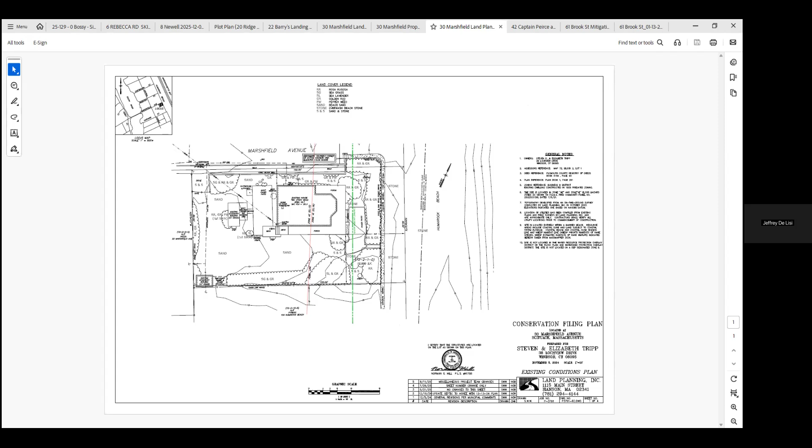The property presently is non-compliant with Title V standards. The goal of this was - this is entirely a previously disturbed site. It was once the site of a hotel. There is, as so many of the properties along the ocean, which is directly to the east of this, on the right of your screen.

As is the case, there's a concrete retaining wall which you can see that kind of goes the entire rear of the property and wraps around into Marshfield Avenue, which is not actually a street that is utilized for passage of vehicles anymore. It's kind of stopped off by the town because it's kind of the entrance to the public beach. So essentially, over time, my client has planted some Rosa rugosa.

They've owned the property for over 20, maybe 30 years. Sand has migrated and so forth into the property in the approximate area, especially along Marshfield Ave, and then you can see on the plan there's some vegetation that's in the area of that building, the detached building to the left of the dwelling.

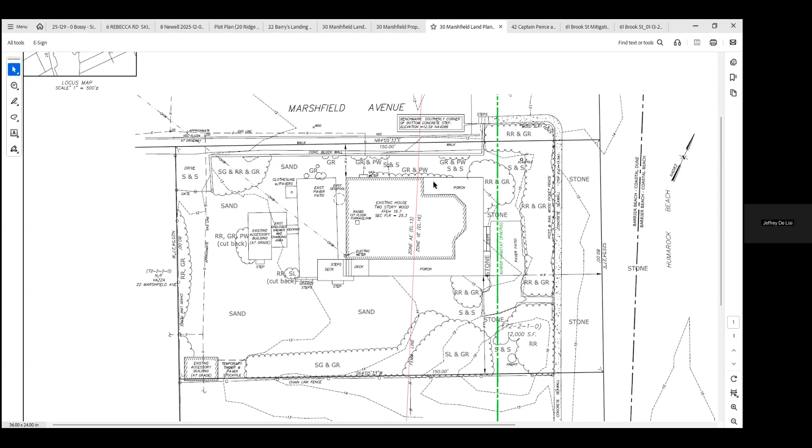What the plan and the goal is here is to create an ADU by removing that building in the detached building to the left of the dwelling, and by removing the accessory structure off the bottom, on the corner of the property, bottom left, and by removing the patio, and thereby putting an accessory dwelling unit in.

The planning board has approved the ADU to be a 742 square foot gross living space ADU, and you can see it there, but it looks bigger than that because the dash lines on the top and bottom of the box indicate decking. So it's really 742 square feet, and then there are two decks totaling about 336 square feet off of the north and south of the actual dwelling unit itself, attached to it.

And the concept here is to raise the structure onto piles and take what is existing, two buildings, completely outside and above the FEMA flood zone.

When we were here, we've addressed that Stan Humphreys, our coastal geologist, had submitted two letters to the commission going through the standards of coastal dune. There was some question early on in this application as to whether there would even be a pathway for approval of this. I think I explained to the commission that I had spoken with Greg DeCisa. He confirmed and told me that I can tell the board that the standard for new structure in this area would be no adverse impact on the resource area.

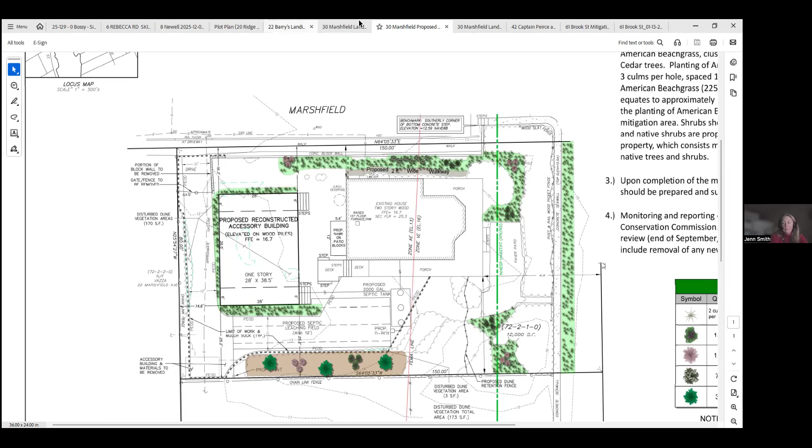Okay. And then we have to move out to March 2nd. I would do March 16th or the 30th. Okay, I'm just saying I wouldn't do March 2nd. Okay, all right, so if somebody wants to try to make a motion...

I'm not trying to make a motion. I'll make a motion to continue 30 Marshfield Avenue until the March 16th meeting. That's Robbie. Do I have a second on that? I'll second that, it's Roger. Penny? No. Okay, Eric? Yeah. Okay, and Frank, yes.

So we'll continue to then get that information to us and anything else as soon as possible, if you could. Yeah, I appreciate it, thank you very much. And I think you get the gravity of where we're going with this, Jeff, and I hope we can get some real good information. What's the date again that you landed on? March 16th. Okay, thank you very much, everybody.

You don't have any deposits down for a vacation then, do you? If I do, I'll cancel them for you. Oh my God, I wouldn't do that. All right, thank you very much. Have a good evening. Yep.

Let's see. What's here? 61 Brook Street, I got to open that one.

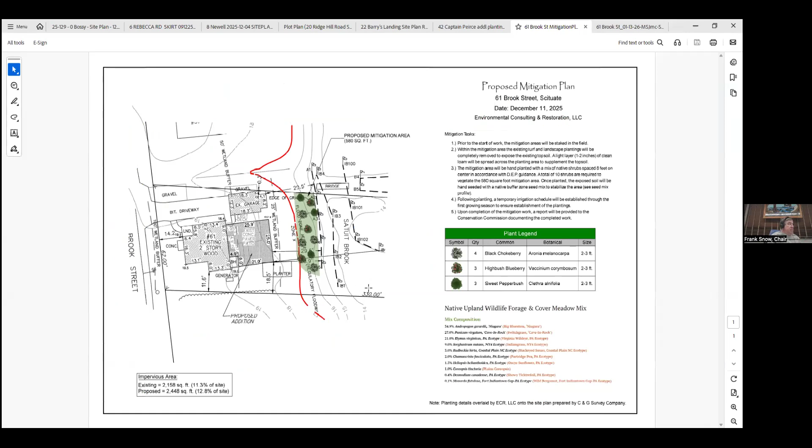On January 21st, 6 p.m., the Scituate Conservation Commission will hold a wetland hearing under Chapter 131, Section 40, the Massachusetts General Laws, and Section 30700, Town of Scituate Code of Bylaws, for a notice of intent filed by Dana and Denise Baki, for the construction of an addition of a single-family dwelling within riverfront and vegetated wetland resource areas located at 61 Brook Street, Scituate. Abutters and other interested parties are invited to attend. Information to access the meeting will be available on the agenda posted on the website.

Good evening, members of the commission. Brad Holmes from ECR on behalf of Dana and Dennis Box for their property located at 61 Brook Street. We filed a notice of intent for a single-family home improvement project. A DEP has reviewed the application and issued a file number.

Thanks, Jen, for pulling up the plan. What you have in front of you is the existing and proposed conditions plan to include the mitigation proposal. So let me go over what the site contains, and then we'll get into the home improvement project. So 61 Brook Street contains an existing single-family home with a paved driveway, a detached garage, patio, well-maintained lawn and landscape. And as you move to the right of your screen, or easterly, there's the Satuit Brook with its wetland resource areas that flows through the property.

So we have the Satuit Brook with a 200-foot riverfront area. We have land subject to coastal storm flowage, which you can see there in the red line is the FEMA flood zone associated with the brook. And we also have a little bit of a bordering vegetated wetland fringe to the Satuit Brook.

The property actually extends quite a bit to the right of your screen. It heads over to almost towards First Parish Road. The property was built according to the Scituate Assessors records in 1895, so it's a property that predates the wetlands regulations. Thanks, Jen. You can see that it is a fairly larger parcel, but unfortunately that land to the right is a wetland resource area.

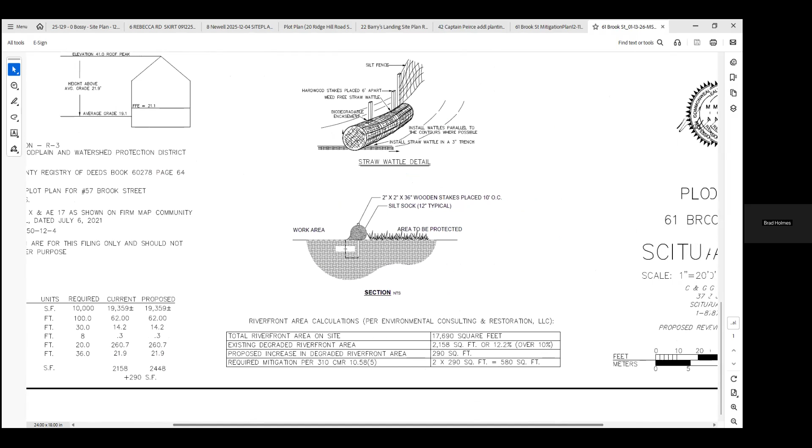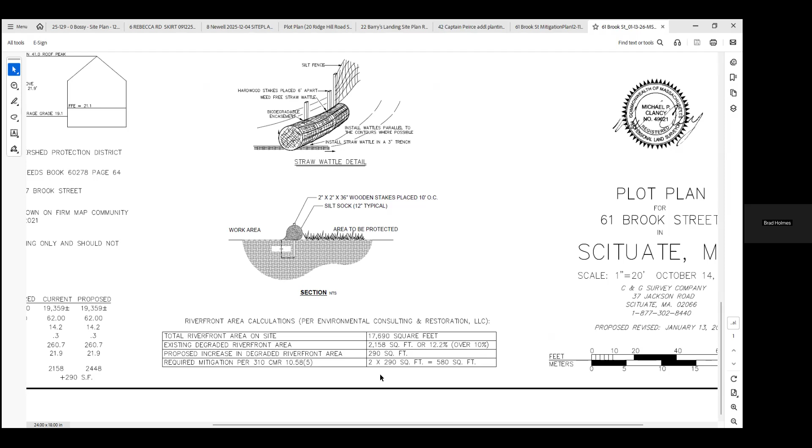So for this project to comply with the riverfront standards, because it's a previously developed riverfront, we're held to the standard of any new increase of degraded area, which would be the area of the proposed addition outside of the patio. We have to mitigate that. So we have approximately 290 square feet of new degraded area associated with the addition, that's the portion of the addition that would sit over the lawn area. So to comply with the riverfront regulations, we need to mitigate that at a 2-to-1 ratio. So we're proposing 580 square feet of mitigation, which would consist of native plantings to remove a lawn and landscape area and revegetate that with native vegetation, native shrubs, and a seed mix. And that would also increase the vegetated buffer strip, which the Conservation Commission regulates under the wetlands bylaw, so we're able to stay outside of the FEMA flood zone.

We're able to develop over the existing developed lawn area. It's a fairly smaller improvement project to bring this home up to a better livable standard. With that, I think I'll bring it back to the commission. We've been able to meet compliance with the riverfront regulations and other regulations, and I think we've been able to come up with a good mitigation proposal to increase the vegetative buffer strip to the stream. So with that, I'll bring it back to the commission.

Thank you, Brad. Jen, do you want to comment first? Yes. Can we zoom in a bit more so we can see where the proposed work is?

I do want to say no comments from DEP. We do have proof of abutter notification, and the plan we're looking at is from 1/13/2026. It might be a little hard to see, but in the back of the house there is a concrete patio that almost goes to the back of where the garage is. So that's some of that disturbed space that's already there that I think they are trying to work with. Otherwise, there is some of this addition adding to the 50-foot buffer. And the work is outside of the flood zone, as was mentioned. And as you saw on the other plan, we do have a mitigation plan with some details to it.

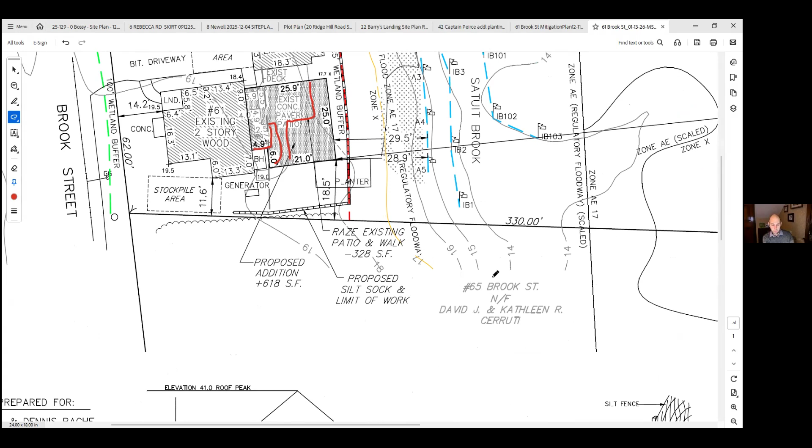I'm looking at the narrative that I have in the notice of intent. There's a riverfront area calculations. Are you referring to the numbers on the plan in the table, or the narrative? The one that's on the plan, just because, and maybe I'm misunderstanding this, but for riverfront, the percentage degraded is in totality of what's on site currently within that riverfront area. So I just was looking for clarity. It's just if you could walk us through what those numbers are in reference to what's on the plan in front of us today. Sure.

So the total riverfront area on the site is as stated, 17,690 square feet. The existing degraded riverfront, which consists of areas that have a loss of topsoil, so it would be the driveway, the walkways, the patio, the garage, that's 2158 square feet or 12.2%. So we're already over the 10% of riverfront that you'd be allowed to add up to. What we're proposing of new increase of degraded riverfront is 290 square feet. That's the area of the proposed addition that's outside of degraded area and sits within an area of lawn. Even though the lawn is developed, it's not degraded per the riverfront standards. Right, so any increase that we do on the property, because we're already over 10%, the only way that we can accomplish adding new degraded riverfront is if we mitigate that at least a 2-to-1 ratio. So we're proposing the planting area at 580 square feet to comply with the increase of that 290 square feet.

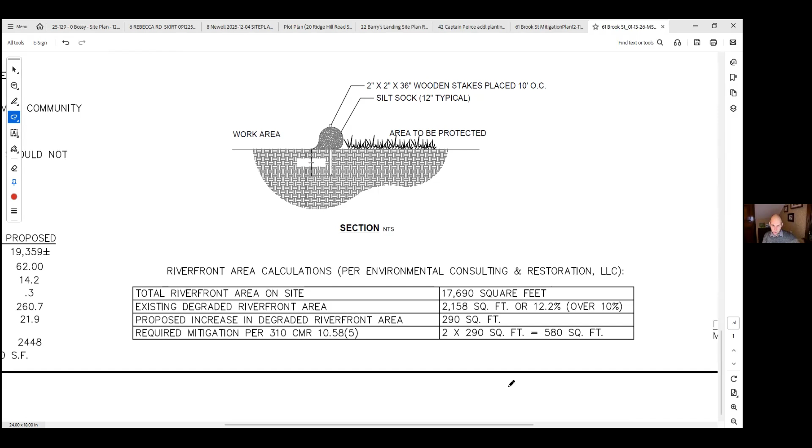Excellent, thank you, I appreciate that. Just walk through on that, so we could all have an understanding of where that number comes from and what that number at 10% means. So thank you for that. Sure.

My other sort of thought on this is just work within the 50 that is new, in terms of impervious area outside of the existing concrete paver patio and existing garage. I don't know if there's a way there could be a reduction of work within the 50 that does not already have impervious on it, whether that's the existing deck still visible here on the plan, or incorporating the garage into the project, working within areas that have already been disturbed within the 50 rather than introducing new encroachment onto the 50, because that's certainly something that, as you know, this board tends to push back strongly on.

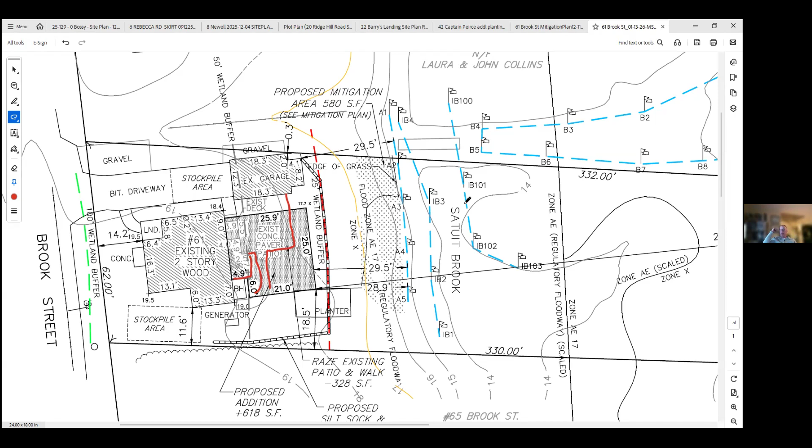Dina, want to I'm here. Yeah, I am. We're eliminating that back entrance, so we have an entrance in the front door and the current one on the side. There won't be an entrance between those two, where the 25.9 is, not on that side. I'm not sure - north is to the left? To the top. Yeah.

I mean, would grass grow between those two structures? I'm not sure, maybe, I guess. I don't know, if we take out the patio - I'm not sure enough sunlight would reach it, but I guess I don't know. That's my only thought on changing that area to grass.

And then where the proposed mitigation is, that's currently lawn, the 580 square feet of mitigation area - yes, it's lawn and there's a landscape planting bed in that area. So we take out the landscape planting bed and lawn and then replant it with natives. Okay, well I think that if the elimination of the patio between the two structures causes a reduction in that mitigation area, I'd rather have the mitigation area than the grass between the two buildings, personally.

So then the 25 by 25 foot is like a 625 square foot addition? Actually, it's listed on the plan as 618. 618, okay, thank you. No other questions.

Okay, Roger? Yeah, if you said this I missed it, Brad - what's the distance between the proposed structure and the garage? Going back to Robbie's question about grass growing there, how big of a space is that? It's not marked on the plan, but I'd say probably 5 or 6 feet. Okay, okay. All right, I don't have any other questions.

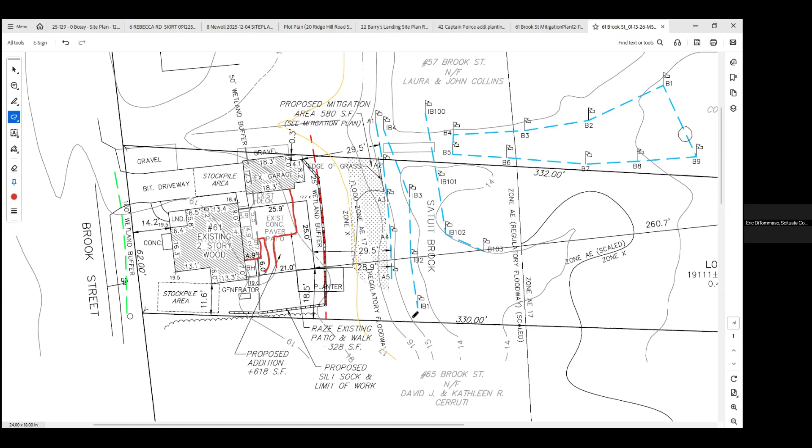Did I cover everybody, right? So I get it, it's a tight area. Houses are already established. The brook already has a garage that encroaches. So it looks like the applicant's sort of holding this similar encroachment towards the brook.

And this is on a full foundation. I think you said that. So there's obviously going to be a little bit more disturbance towards that buffer until it's backfilled and graded. Sorry, I think he said it was a crawl space. So either way, they're still got to dig down 4 feet or so.

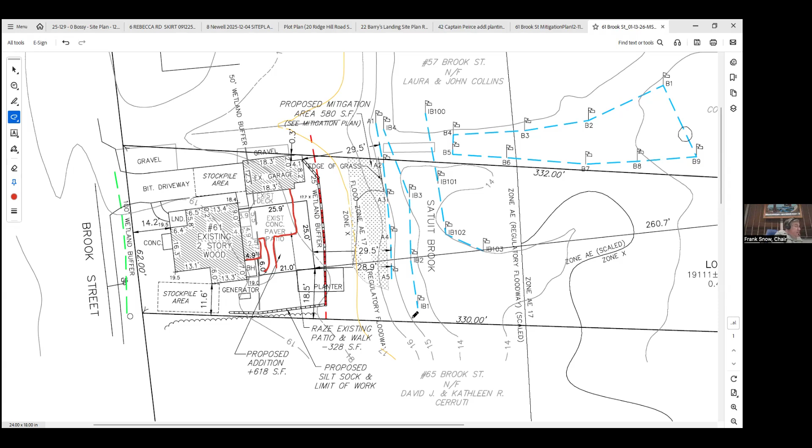So, the trenching and the fill material and whatnot, you're going to disturb probably another 5 or 6 feet beyond, and then it'll get replanted.

I also know that all along that stretch, there's a number of houses that are pretty close. The old fire station sits on top of it, or the parking lot. There's just a lot of encroachment along there. I think in terms of environmental benefit, certainly we don't like to see things encroach more, but if we were to get a substantial buffer, to me that would sort of balance out

the additional encroachment. But I'm wondering if that mitigation area could extend from property line to property line. I'm not quite sure why it has that little curving piece, Brad.

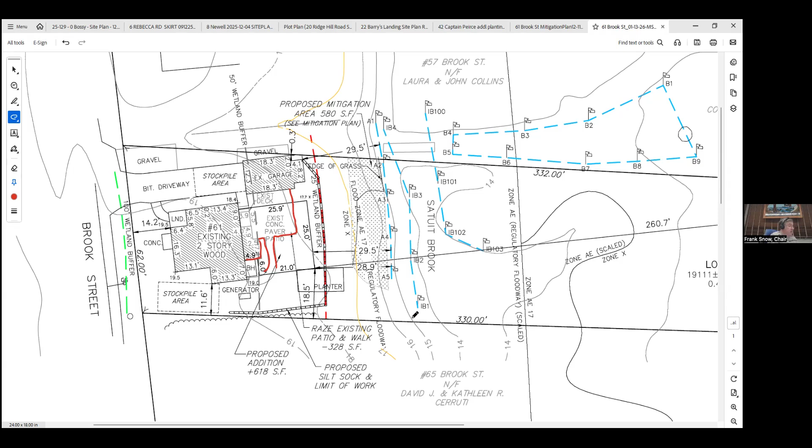Yeah, we could look at that. Is there a reason that... That was kind of, yeah, it was taking into account there's a landscape bed there and there was lawn. When you look at the property in the field, the bridge that's actually on the other side of the property line kind of feels like this property. So in the field, the property lines feel a little different than what the surveyor was actually able to correct. But we can look at bringing that mitigation area further, I guess, west, and also address Eric's comments.

I guess that's what I'd like to see, is just some more mitigation. We're willing to work with a 25-foot buffer, or 30, whatever it looks like. Maybe it might be close to 30 feet as opposed to 50. But I also get there's already a concrete patio and some other changes, so it'd be good to see some of that

corrected. How do you want to move forward? Anybody? Jen? Well, Robbie does have his hand up, and I'm sorry. Robbie?

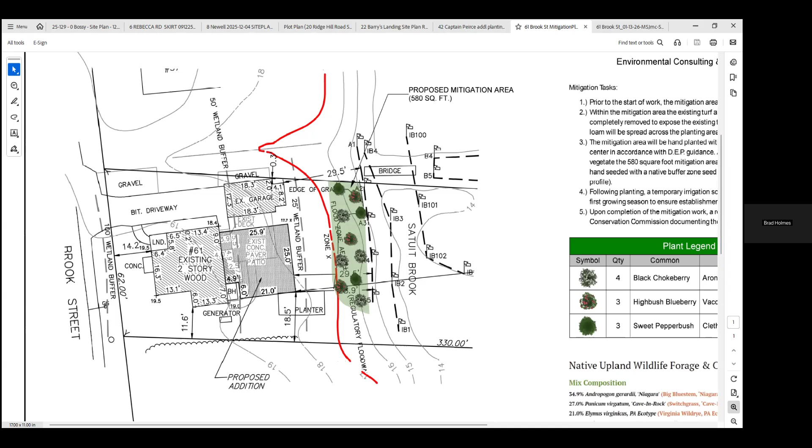Yes, we're in the 50-foot, but as I said, this property was built in 1895, so we're stuck with what we have - but how can we make that better? How can we make a better vegetated buffer strip than what exists now? This site doesn't have a vegetated buffer strip, but if we can come back to the commission and show you we're creating a new buffer strip that significantly mitigates the proposed addition, then I think that's what we're going to look at doing and coming back to you.

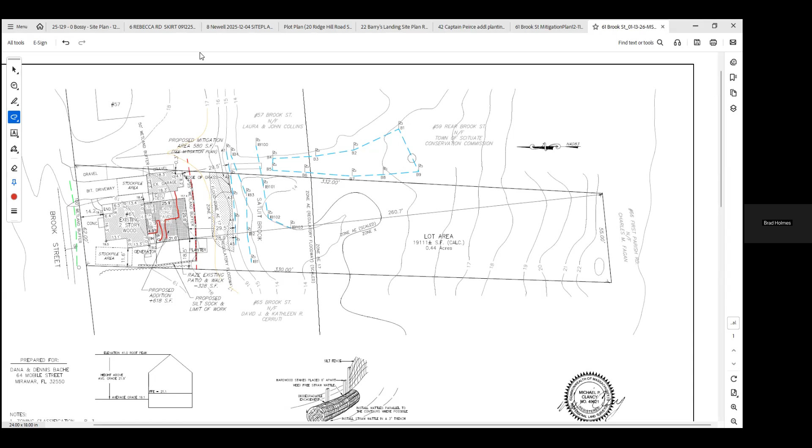Just moving it away from the brook a little bit would be helpful. Maybe architecturally it's the way that it works, but I think the setbacks in that zone are only 8 feet, if I remember correctly. So something to consider - they might be able to get close to the same square footage but with a different configuration. I'd take a look at those things in the buffer, let's continue it and come back to the commission members and see.

The other thing that might be helpful - I know you can't go into other people's property, but maybe next time give us an image of what it looks like to the left and right of this property so we can see how that disturbance impacts the area around it. I think it would be helpful to know what's happening on either side, even if it's just some aerial information.

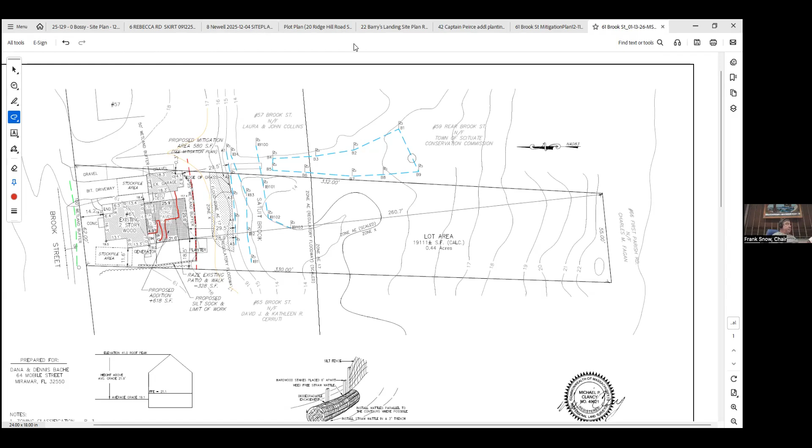20 Ridge Hill, this is a continuation. I think we opened it, but I don't remember if we've discussed it - I think we just continued it, and this is Brad Holmes as well.

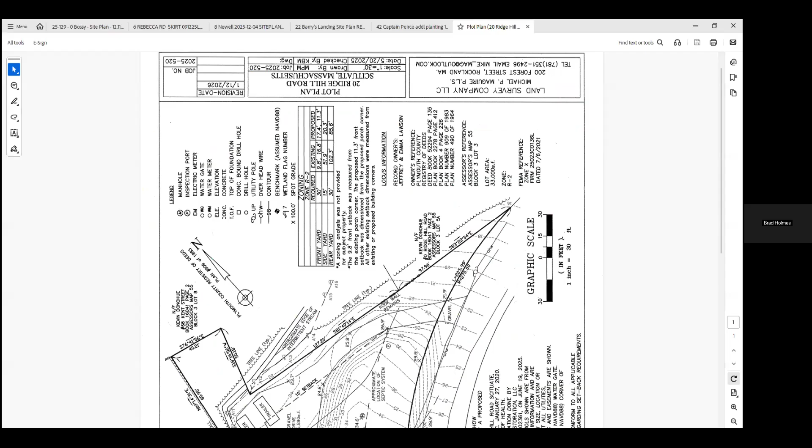We've submitted a notice of intent for 20 Ridge Hill. The applicant and owner, Jeff Lamson, is on the line. The application is for a single-family home reconstruction project. DEP has reviewed the application and submitted a file number. The site contains a single-family home, an outbuilding or accessory dwelling unit, driveway, lawn, and landscaping. This is a pre-existing building built around 1900, according to the assessor's department.

Thank you, Jen. You can see the property here off Ridge Hill Road. The existing house is situated towards the front, near Ridge Hill Road. There's a driveway extending around the property, coming into that existing building and deck area of about 900 square feet, then continuing around the rest of the property and exiting back onto Ridge Hill Road.

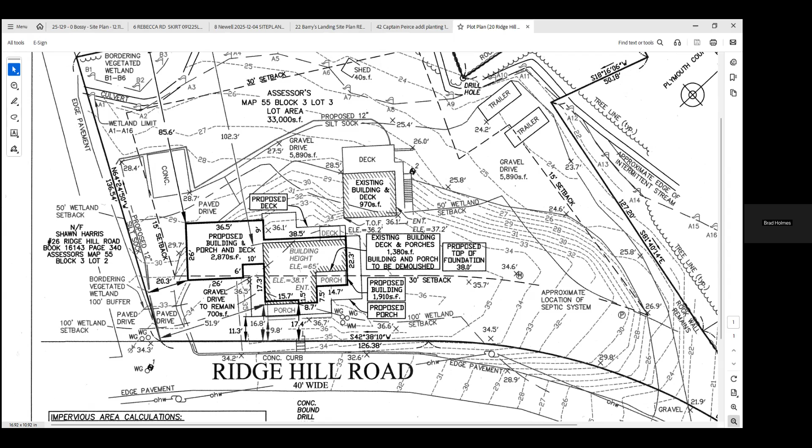We're here with the commission because there's a bordering vegetated wetland with an intermittent stream located on the site, toward the western portion, heading north. The wetland has been delineated - you can see the wetland flags. The 50 and 100-foot buffer zones extend from there. The 100-foot buffer zone almost hits the street, so we're fully within the jurisdiction of the commission. We don't have flood zone or other resource areas like riverfront on this property, unlike the last project.

What we're proposing is to remove the existing home and reconstruct a new home, basically within the general footprint of what's existing now, adding an addition off the south side. The addition would contain a porch and deck, totaling 2,870 square feet. The area of work occurs outside the 50-foot buffer zone.

The change in impervious surface is approximately 5%. The project doesn't require a stormwater permit per the Scituate stormwater regulations. The project doesn't necessarily trigger mitigation since we're not working within the 0 to 50-foot buffer zone.

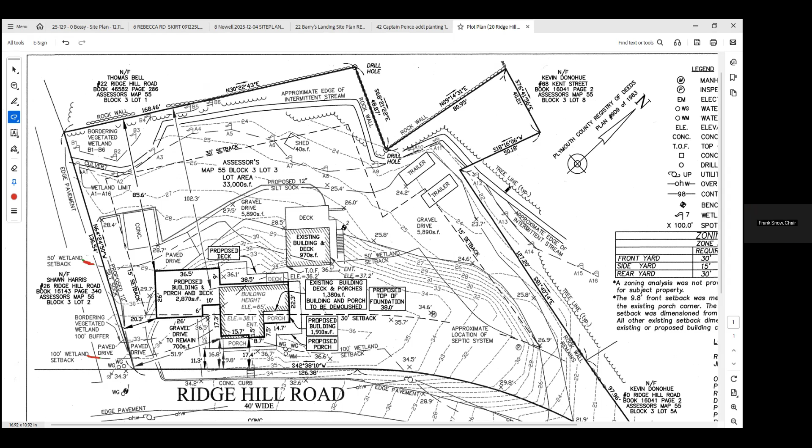So this is 8 Newell Street on January 21st at 6 p.m. Scituate Conservation Commission will hold a wetlands hearing under Chapter 131, Section 40 of the Massachusetts General Laws and Section 30700 of the Town of Scituate Code of Bylaws for notice of intent filed by Christopher Wynn for the demolition and reconstruction of a single-family dwelling within coastal wetlands resources located at 8 Newell Street, Scituate. Abutters and interested parties are invited to attend. Information to access the meeting is available on the agenda posted on the website.

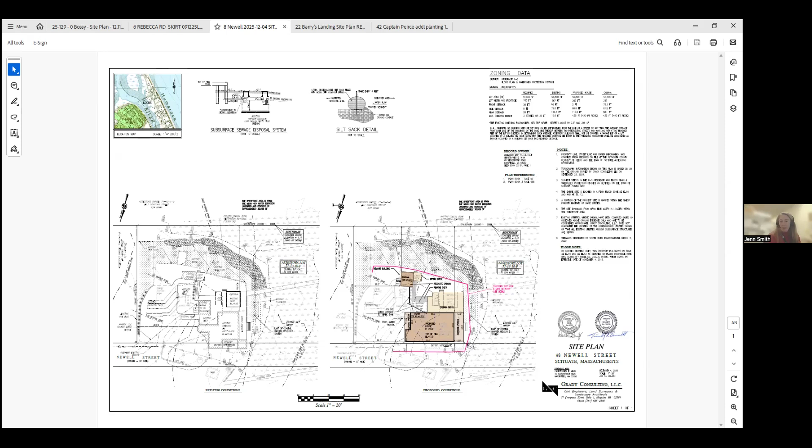And we have somebody from Grady, maybe? Okay, Jeff DeLisi, I'm unmuting him. Sorry, and then is somebody from Grady here? Yeah, Darren Grady, you can look for Darren. Darren, all right, I unmuted Darren. And you might want to promote Chris Wynn in, to the extent that you ask some questions he could be responsive to—that way he might be unmuted.

Jeff DeLisi, Ohrenberger, DeLisi and Harris. I can't remember the composition of the board when the prior projects that involved this property were before it. Those projects were after COVID.

Chris and Beth Wynn own the property. The two prior projects that occurred were a dock project and a project to remove a pool, which I don't really need to get into too much, but both of those projects were issued—one was issued an order of conditions, the other, the removal of the pool, was issued a superseding order of conditions in 2022. Both, to my knowledge, have received certificates of compliance. The superseding order of conditions actually verified the wetland flagging that had previously been done by South River Environmental, which is depicted on your plans before you tonight.

The Newell Street, it comes in off of Central Avenue, and actually runs in both directions, east and west of Central, out in Humarock.

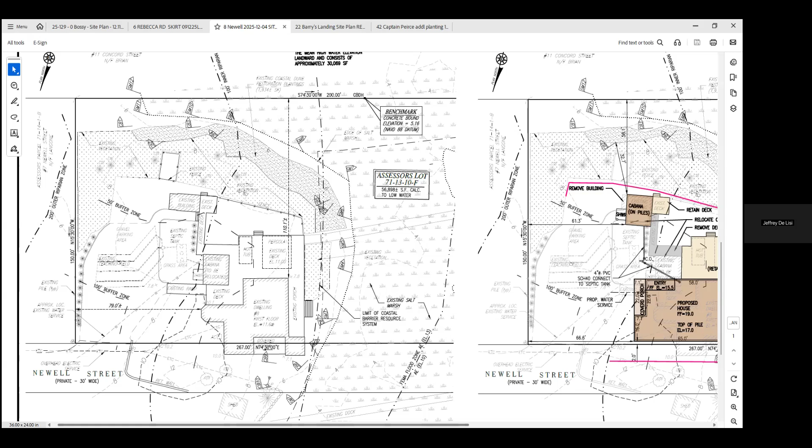So the net is the buildings that would be reconstructed would all be above the base flood elevation, in compliance with the building code and FEMA. There will be less decking than exists now, and one less building than exists now. So we're improving it from a flooding standpoint, and we're getting no closer to the river resource.

That's the project in a nutshell. It's actually a net reduction in impervious coverage by approximately 176 square feet over what's there now. So with that, Darren Grady's here if you have any specific questions about the plan, and I'll give it up to you.

Can I add a couple things? So the increase in setback from the wetland goes from an existing setback of 3.1 feet to 8.5 feet. DEP did review this and did issue a file number. The project raising up on piles is actually improving the dune function within this area, and there'd be more sand surface on the site.

As far as construction erosion controls, in red there's a silt sock proposed to be used to maintain the construction area within its limits. And that is it, if you have any questions.

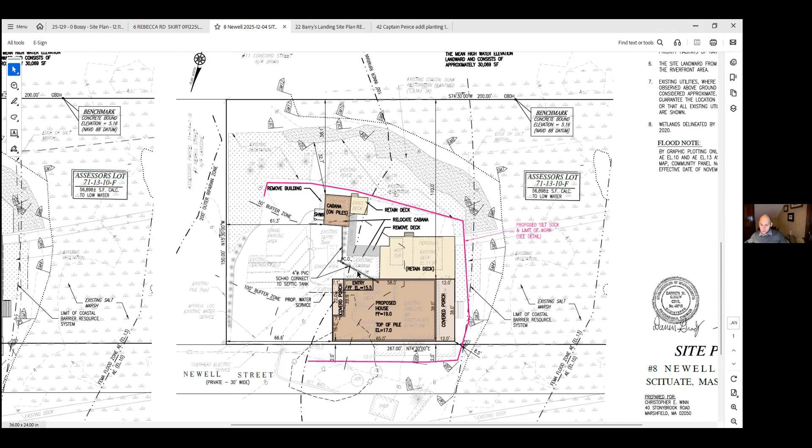As far as I'm aware, the 3-foot is part of the 10th edition. Okay, I'll take a look at that. Darren, didn't you have a different opinion on that? Didn't you look into this at the request of Jen?

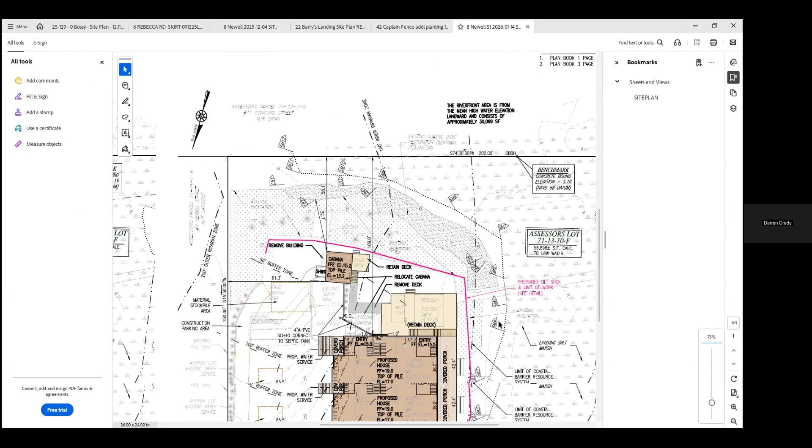Yeah, our opinion is that the first floor has to be 2 feet above base flood elevation in the AE zone, and it has to do with us being in building district 2, under the rules. I think we provided all that information, if they need to, but look, we looked at it.

We need to look at it, and I don't want to waste anyone's time, but we need to look at the 10th edition just to make sure. And I'm sorry, the plan I was looking at didn't have the elevations listed on the cabana, so that's where that comment was really generated from. But regardless, I think it would be worth looking at that 10th edition.

Are you looking at the most recent plan? Because I think those elevations were added with the plan set that was sent to Jen on the 14th. Yeah, I just updated it. That was my bad, I was showing an older plan. Okay, yeah, so Eric, the elevations are on it, but your comments are noted and we'll take a look at those other issues. Jen, what were you saying?

I was saying that this plan needed to be opened, so that's good. Oh yeah, and then I'll add, about how in these resource areas we don't want to see enclosures below the lowest horizontal structure. I think the wording is: enclosures are not permitted below the lowest horizontal structural member of the lowest floor.

So when I hear about different types of panels and garage doors, something we don't normally... I guess what I'm grappling with is the word enclosure. I guess with a structure where we're only proposing something on 2 of the 4 sides, and on one of those other 2 sides, we're proposing it to not be enclosed, to stop before the grade. What is your idea of enclosure? Are you saying any side, or isn't an enclosure like all 4 sides? I'm trying to understand, I'm not being sarcastic or trying to be sarcastic, I'm just trying to understand about enclosure.

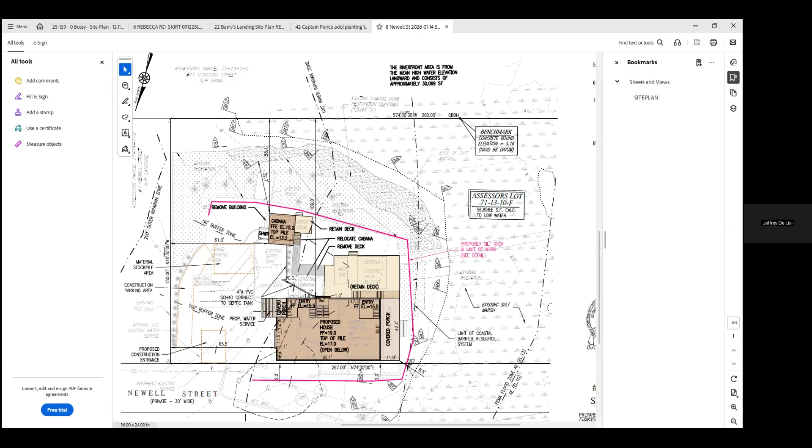Thank you. Good evening. 0 Bossy Lane, this has been continued. Yes, we have Greg Morse here, and we received comments from the peer reviewer from Lucas Environmental. She is here as well, but I think Greg might have a couple comments to make first.

Okay, sure. Good evening. Greg Morse, registered engineer, Morse Engineering, representing the property owner, Bossy Lane Realty Trust. This is the third continued hearing. This was a notice of intent for a new single-family home on Bossy Lane. Since the last meeting, we've made no plan changes.

We were awaiting peer review response. We received the peer review response from Lucas Environmental last Wednesday, and as last Wednesday was the submittal deadline to submit revised materials, we didn't submit anything further. That review letter, I believe, is going to say that we've addressed most of their comments, that there are no plan changes necessary.

We did, however, want to incorporate two comments from the commission into the wetland replication plan that had been submitted, and we plan on submitting those revisions immediately after this meeting tonight.

Those changes are that only a third of the meadow area would be mowed in any calendar year. Secondly, we would leave composting or mowing clippings in place in the meadow area. And lastly, we were going to more clearly identify the seed mixes in the restoration and replication area. Again, all of those changes are in the written narratives provided by Brad Holmes.

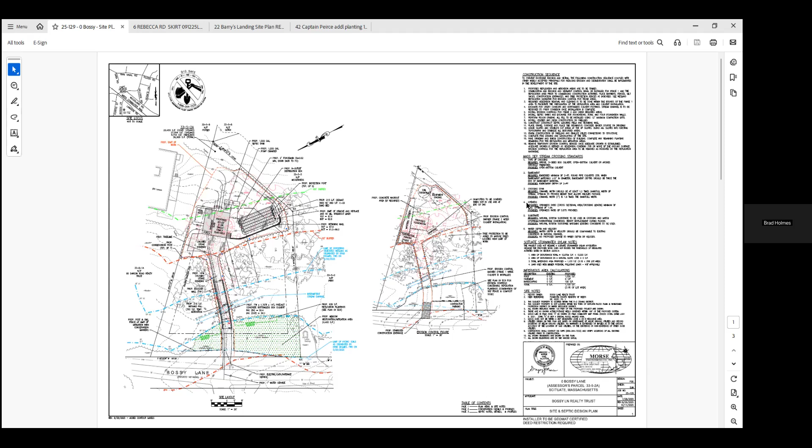If Brad, you're suggesting that this restoration meadow is the mitigation for that sort of thing, or there should be more? I believe it is, but we could certainly add a row of trees along Bossy Lane. I can coordinate with Greg on that. Yeah, I think either there or some more in that wetlands area if it doesn't have a good crown cover, wherever they seem like they'd be most beneficial environmentally. Sure.

Okay. So do we want to continue this? Do we want to close this with those pieces to get resolved? Jen, what's your preference? Well, from what I'm hearing, it's notes and details that we're looking for. Yep.

So we can close knowing that, yeah, I guess requesting that some additional details be sent about the mowing. And I guess where I'm going with all of this is we would be ready at the next meeting on February 2nd to issue. So if you want to just wait to the next meeting to have everything, but we really don't have much to discuss other than just allowing there to be time to get everything.

All right, well then let's do that. Let's get the revisions in, and that way we can close and issue. Okay, all right. So I need a motion to continue to February 2nd. I mean, because I think we'll get all this week. Yeah, kind of what I was hearing.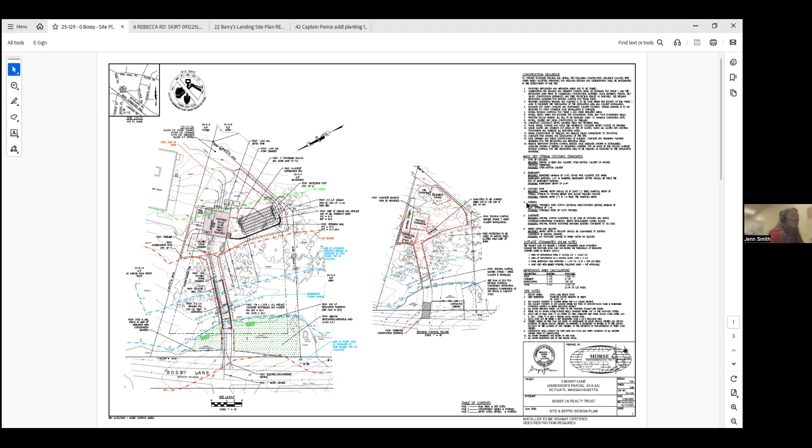6 Rebecca. And yes, okay, we have Greg here for this one. 6 Rebecca received an order of conditions. They had an amendment request, which I think Greg can explain.

Do I have to read that one? Oh yeah, yes you do.

I'm sorry. On January 21st at 6 p.m., the Scituate Conservation Commission will hold a wetlands hearing on Chapter 131, Section 40 of the Mass General Laws, to amend the order of conditions issued under DEP file number 068-3115, as requested by Kristen Mooney, to add a skirt to a dwelling located at 6 Rebecca Road, Scituate. Abutters and other interested parties are invited to attend. Information to access the meeting is available on the agenda posted on the website.

Thank you. Again for the record, Gregory Morse, registered engineer, Morse Engineering, representing Kristen Mooney. This is a request to amend an order of conditions. This project was previously before the commission in 2003-ish for raise and rebuild of a single-family home at 6 Rebecca Road. That project has been substantially completed at this point. The house is up, it's on a timber pile foundation.

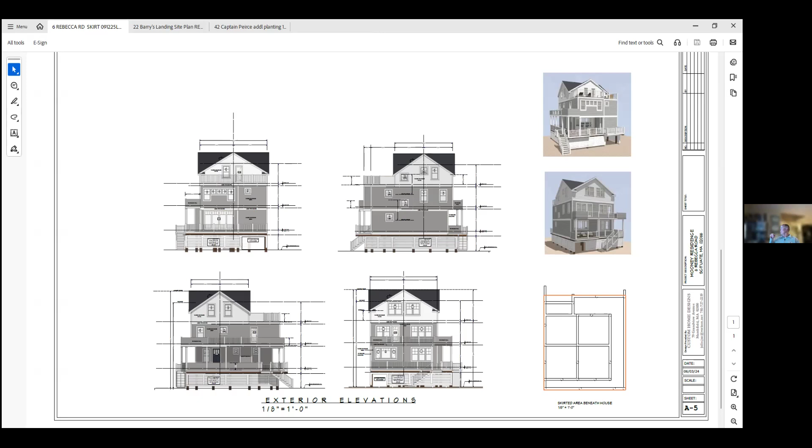Thank you. Okay, get us past 9 o'clock and we're pretty good. Oh, come on, yeah, rock and roll. Let's go. 9:11. I'm falling asleep, the battle of attrition.

That'll do it. How about 22 Barry's Landing? What do we have for that one, Greg? Sure, this was originally filed as a notice of intent for 22 Barry's Landing for a pool project and an addition project. As you recall, it fronts on the North River. We had gone to the North River Commission twice with the project in the last couple of months. We go back to them actually tomorrow night, and we expect their approval tomorrow night.

We've scaled back the project very significantly. We've eliminated the entire pool and patio project. At this point, the project is just a small addition on the back of the house, a 10-foot by 12-foot addition. That addition is over an existing bluestone patio and a pergola, so there's no disturbance of any vegetation at the site. It's outside of the FEMA flood zone. It's outside of the 50-foot buffer zone. I'm going to turn it over to you.

Okay, Jen? That's my understanding also, it's going to North River tomorrow. It is proposed over an area where there's a patio. The patio has changed a bit over the last few years. I think that our jurisdiction is that 100-foot buffer, and it's outside the 50-foot buffer as far as the Scituate jurisdiction is concerned. I don't know if you want to ask for or encourage any other trees to be planted along the river, but other than that, I don't think I have many comments.

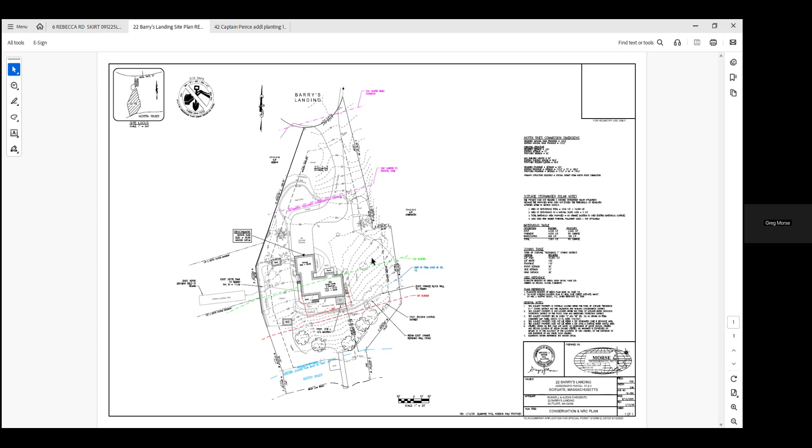Make a motion to close. I think that's a good one. I make a motion to close, that's Penny. Do I have a second? Second, that's Eric. All in favor, Roger?

Yes. And Robbie? Yes. And Frank, yes. Thank you, thank you.

Okay, can we, and we're going to continue 1820 Country Way to an undetermined time? Well, we needed to pick a date. We just got the request to continue, so it would either be March 6th.

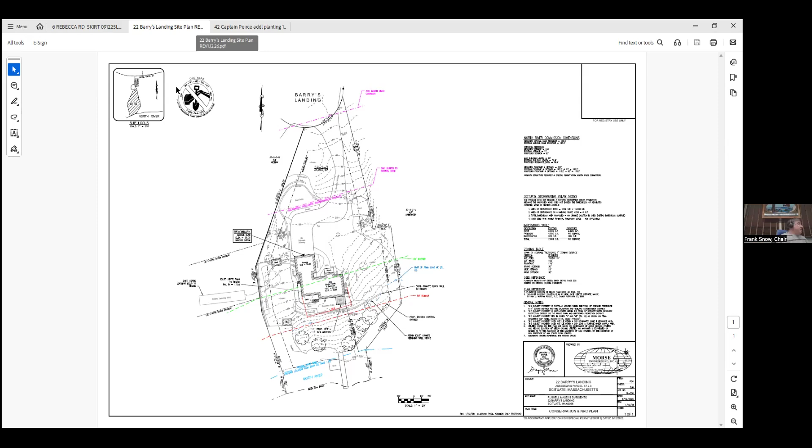How much time do they need? I mean, we've kicked this one out a little while. I would recommend one of the later March dates so that we have enough time to get the plan and get it reviewed, and I know they're working with multiple boards.

Okay, so maybe March 30th, that way we should have ample time. Is Greg still on or is he gone? I am. March 30th would be perfectly fine with the applicant. We go back to the planning board on March 12th. So that works. Okay, all right.

So get a motion for that. I make a motion to continue 1820 Country Way to March 30th, that's Penny. Second, I'll second, that's Eric. All in favor, Roger? Yes. Robbie? Yes. Frank, yes. Great, thank you, thanks Greg.

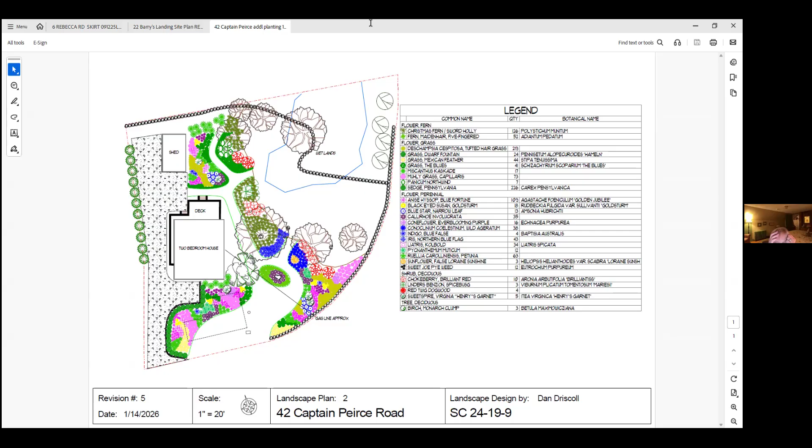Awesome, thank you so very much. Do we have to vote on this, Jen? No, you don't. So I'm just giving you the update. We have one more vote to do tonight.

Well, I have one other thing to add, not for us to think about tonight, but as it regards to skirting, and as Roger pointed out, coming up with a standard, I think one thing we should consider is using base flood elevation moving forward. How that happens, I don't know, but base flood is at least a standard across all sites. And how that intersects with what our standard is, I don't know, but I think that's the metric we should base things off of.

So, like, would it be 12 inches above that base elevation, or 24 inches, or 18? I'm not entirely sure. But using base flood across the board, I think is how we should view that.

I think it's important, but it's also important to remember that the base flood elevation -- the actual topography can be considerably different on each site. I've got to pull up some of that FEMA stuff.

The house next to it has skirting and it looks like it's 12 inches off of their paver material underneath it. They also have an enforcement order. I was just trying to pick something that is ubiquitous, a measurement that already exists that we could leverage. But I hear you on the topography -- I just thought I'd throw that out there.